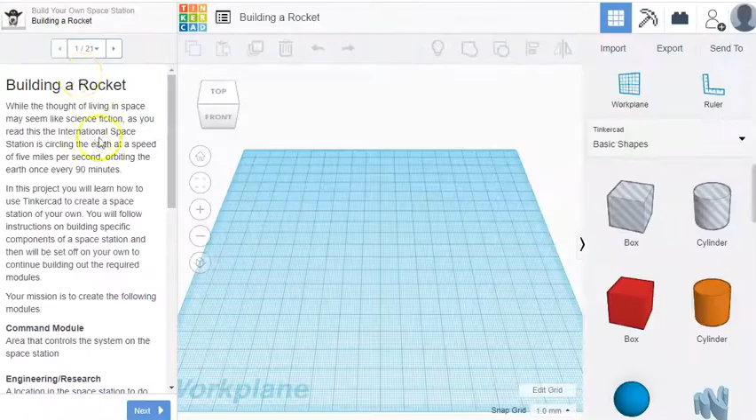Okay, in case anyone needs help, I'm going to work my way through this project. Build your own space station. So you just need to scroll down, go to lesson 1, building a rocket, and we have instructions here that we can progress through. So not every step requires you to do something, but it's a good idea to just read through this information to get an idea of what you're going to do.

So you're going to create the following modules: command, engineering or research, living quarters, storage module, and propulsion. Okay, so scroll all the way down and just keep clicking next. So introduction, first thing we'll do is the propulsion system. All right, so again, just click through to the next one.

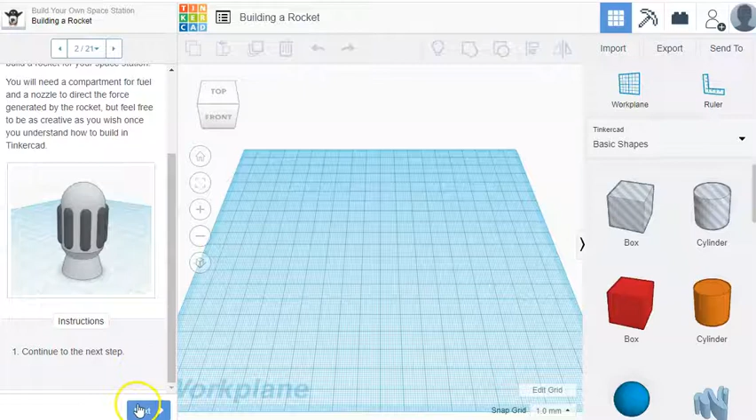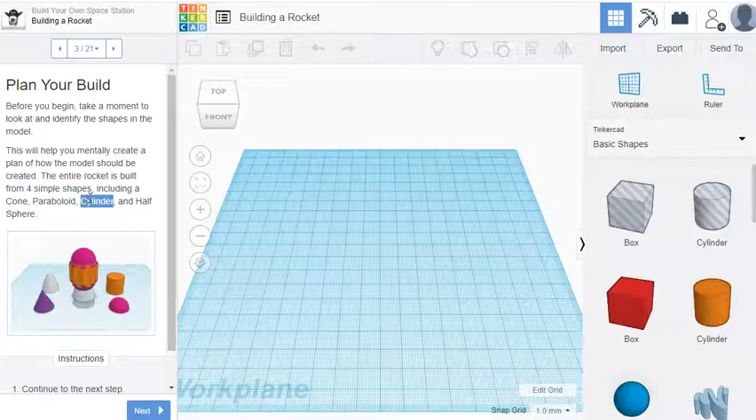Plan your build. So it's just good to familiarize yourself, especially if you haven't used Tinkercad before. So we've got different three-dimensional shapes, including cone, wow, a paraboloid, cylinder, and a half sphere. So you find all these things over here. So here's a paraboloid, here's a cone, cylinder, and a half sphere. Too easy. Go to next.

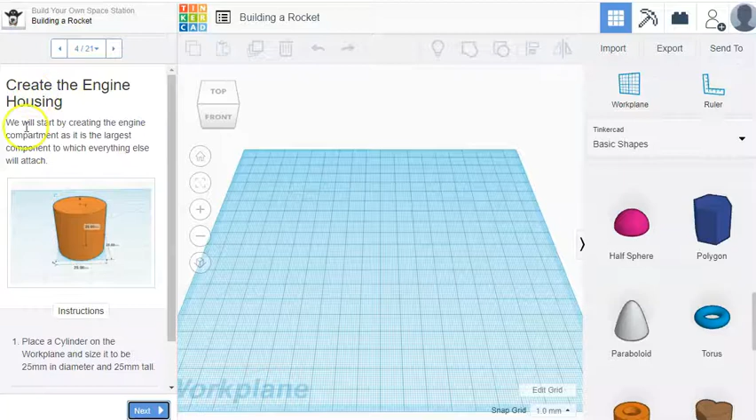Okay, create the engine housing. So here's some instructions. Place the cylinder on the work plane. It's easy. Let's find a cylinder. So you just click on it and somewhere press click again and it will place it. Now we need to resize it. We want 25 millimeters in diameter and 25 tall.

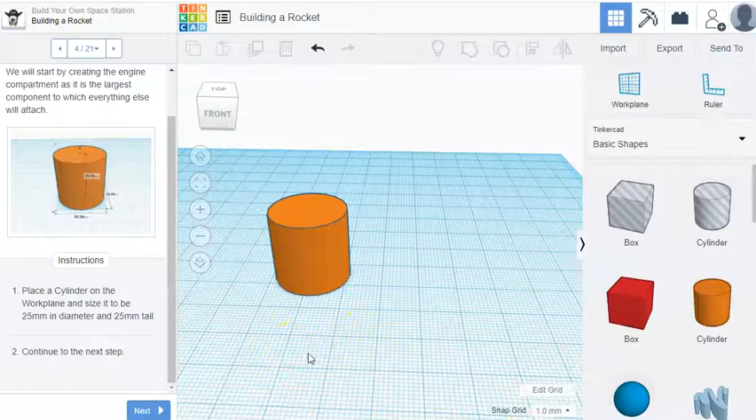Just a few tips on moving around. If I want to zoom in, if you've got a mouse, it's so much easier. So I thoroughly recommend getting a mouse. So to scroll in, I just use the mouse scroll button. All right, if I want to move around, if I click the scroll button, I can drag the work plane around. Also, if I click the right mouse button, I can just hold and drag it around like so as well.

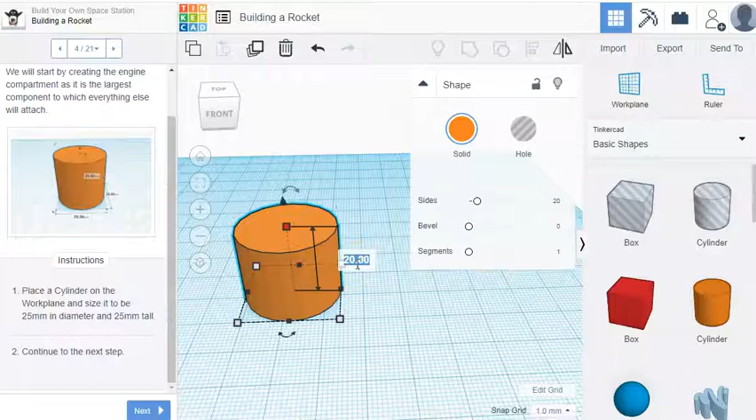I wanted to just reposition this here a little bit and click on it so I can get these dimensions. So here we want 25 mil diameter. So to resize it, I think you can actually type over there to make your life easier. So that's 25 mil diameter, and we want to check the height. So if we click on this bit here, we can see the height is 20, so I can click on that and say 25 and change it that way. So it's that much easier to do it that way. Once I've done that, I'm going to the next step.

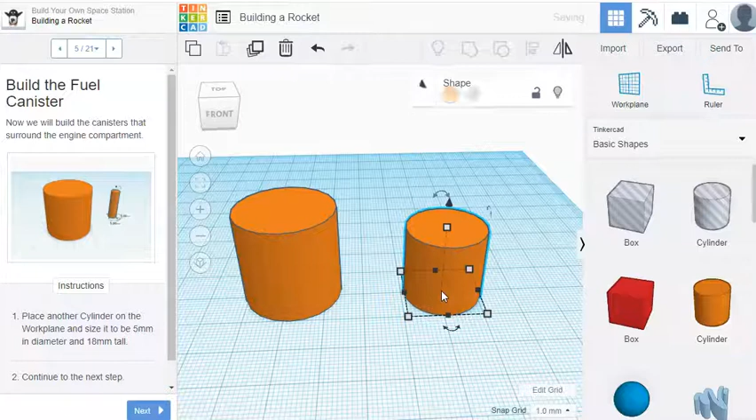Build the fuel canister. So it says place another cylinder and size it 5 millimeters diameter and 18 tall. Okay, so I'm going to get rid of that. Click that and place it. So that means I want to change this to 5 millimeters. 5 millimeters on that way, and then I need the top one, click on that, and 18 tall, so I click here and I change it to 18. That's easy. Let's go to the next one.

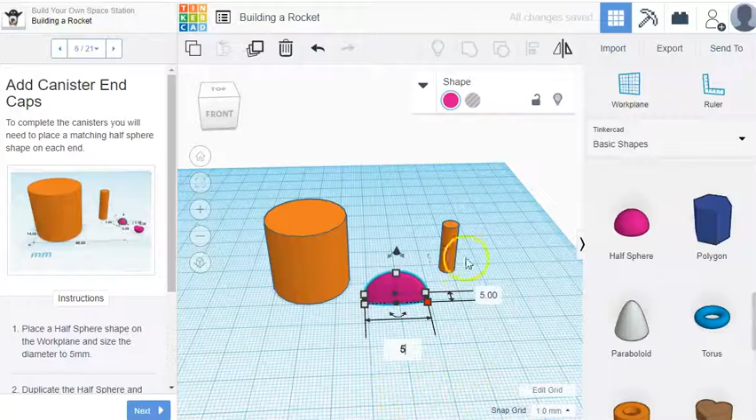Place a half sphere shape on the work plane and size the diameter 5 millimeters. So half sphere, click, place. Let me zoom in a bit. Okay, so 5 by 5. Yep. Okay, how do I get out of that now? I press escape. Okay, so I'm going to scroll out a bit, resize, so 5 and 5. I'm sure there's probably an easy way to do it 2 at once, so someone else might want to work that one out.

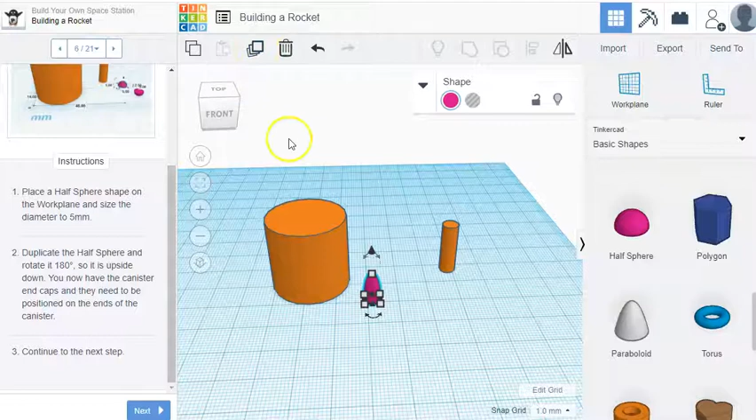Duplicate the half sphere and rotate it 180 degrees so it's upside down. Okay, so I've got to duplicate. Duplicate is this button. So I press this button while this is selected. Duplicate, and then if I move it, I can see I've got a second one. Now rotate. Okay, if these things would all get out of my way so I can actually see what I'm doing. I'm going to just get my right mouse. Okay, so here's my angle. If I click that and say 180, it's upside down.

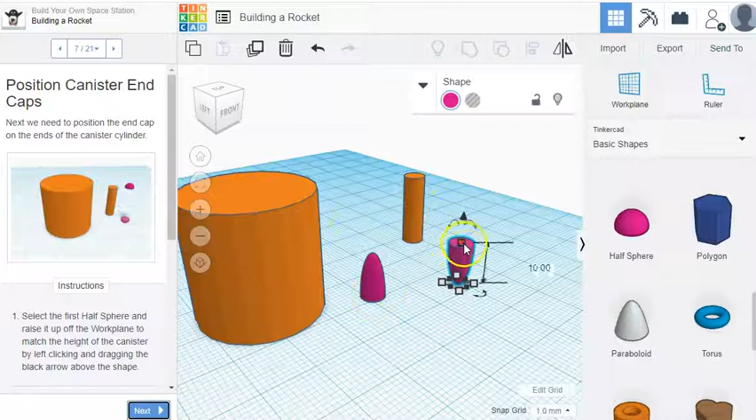All right, but it still doesn't look like that. So I've got to work out, is this correct? All right, obviously not. So they've missed something. So I'm going to resize the height to 2.5, which looks like what they've got in the diagram. So if I change that to 2.5 as well. Okay, and that looks better, doesn't it?

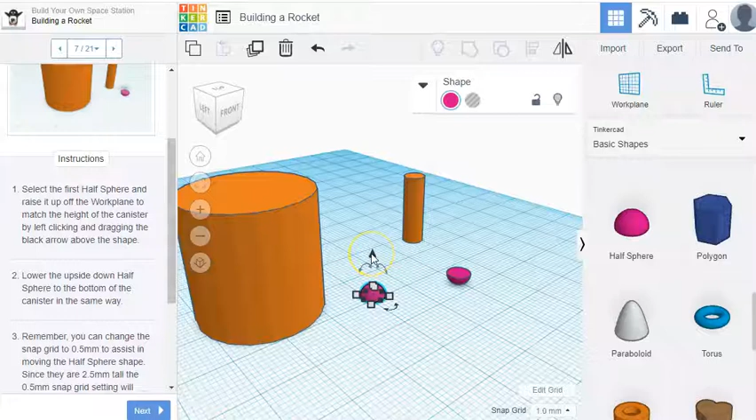So we select the first half sphere and raise it up off the work plane to match the height of the canister. Now the height of the canister is 18. So we want to raise this. So we grab this little thing and raise it. And so we're looking for when it says 18. Voila, too easy.

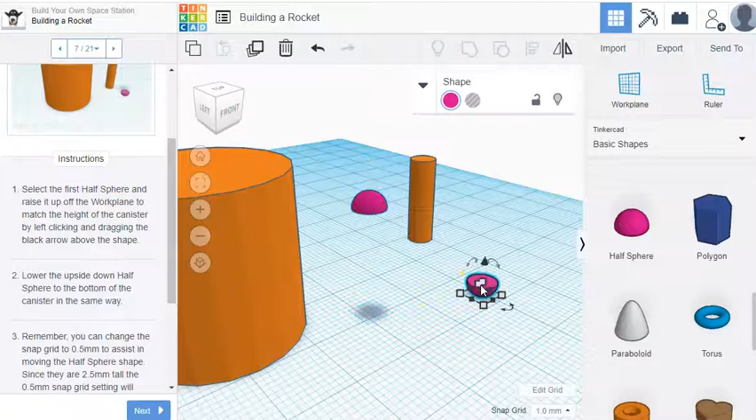Lower this upside down half sphere to the bottom canister in the same way. Okay, so I need to click on this one. So it's currently at 2.5 here. If I click this, I'm assuming I need to make it go there, possibly. Let me just see if I do that. Yeah, that looks like it's the same now, doesn't it?

Okay, so I think there's some assumed knowledge here. Remember, you can change the snap grid to 0.5 to assist in moving the half sphere shape. Snap grid, I found it, it's down in this corner here. So change it to 0.5. Easy, so I've changed it to 0.5.

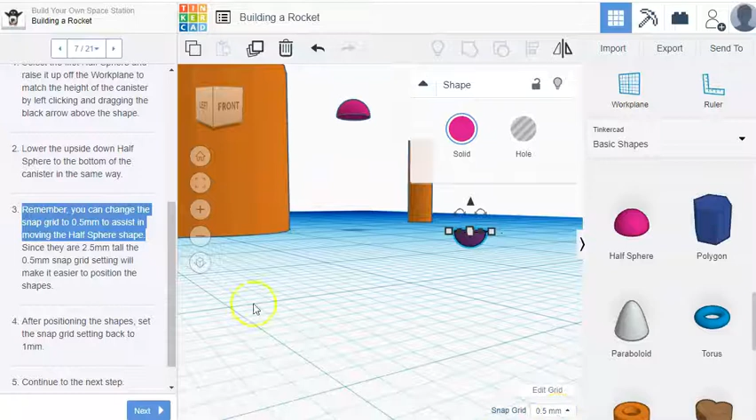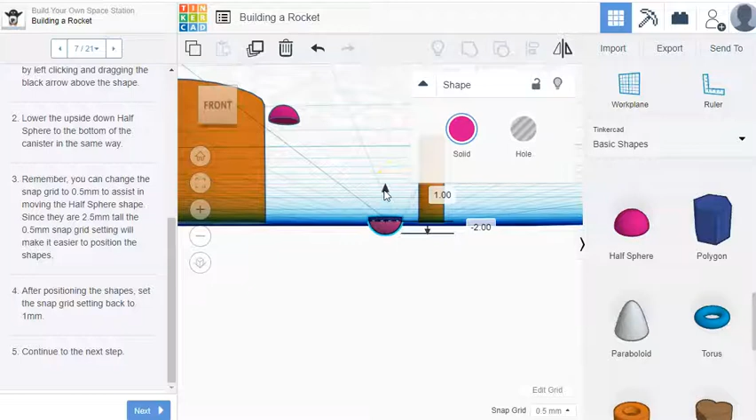Excellent. After repositioning the shapes, set the snap grid back to 1 mil. Okay, well, I think I did that in a roundabout sort of way, but I think I'm right. Let me see. Wait, maybe that, was that better? Oh, okay, that's better. All right, that's done, and put it back to 1. Continue.

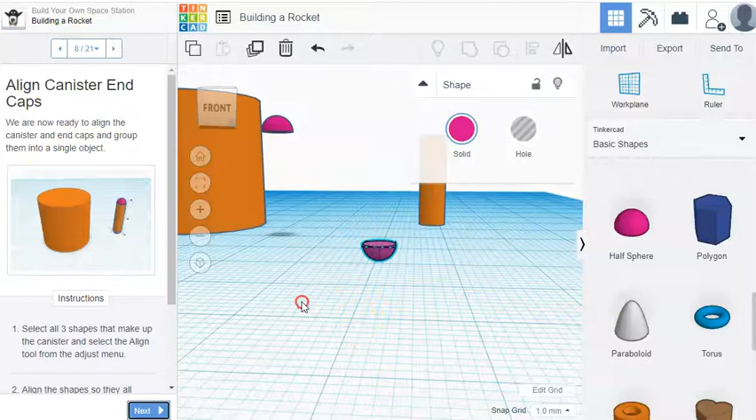Okay, now we're ready to align. So we want to put all of those pieces together like so. So, okay, what I believe you do is click to select the first one, shift click, and you'll see there's little blue shading around both of these now, so they're both selected, and then shift select. So they're all got blue shading, so I'm assuming yes, and it says shapes 3. They've all been selected. Okay, so now align the shapes so they all share the same axis vertically and group them into a single shape.

So again, assume knowledge. Align. Let's give it a go. Okay, and then, okay, align them all here and click on here. Did you see what I did? I'll go Control Z, Control Z.

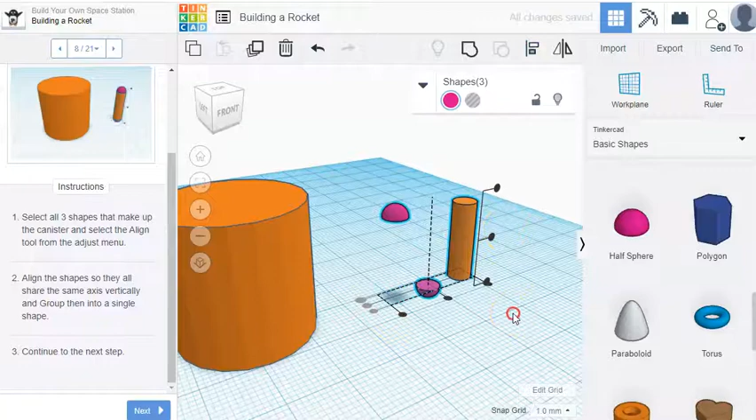So to align them, I press align. Okay, I want to align them all on this in the middle here. So if I click here, they all align up along there, and then I want them now to align in this middle. So see how if I click that, they all come together. Then the last thing I do is group them. So group, press that, and they are now grouped.

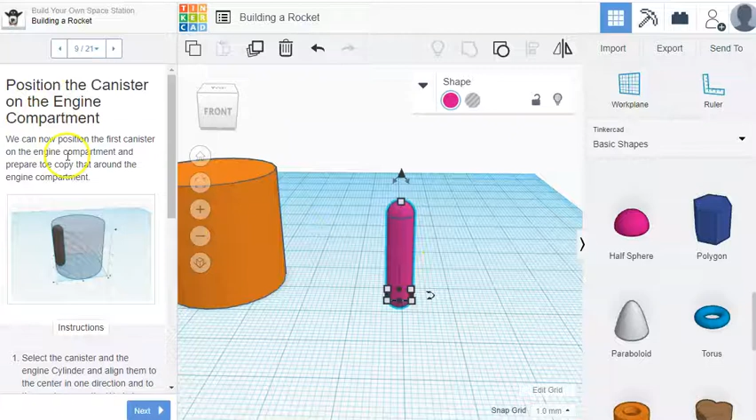Click next. So now we're going to position this canister on the engine compartment. So this is the canister, this is the engine compartment, and we want it to look something like this. All right, so we need to work out how to do that. So get the whole lot.

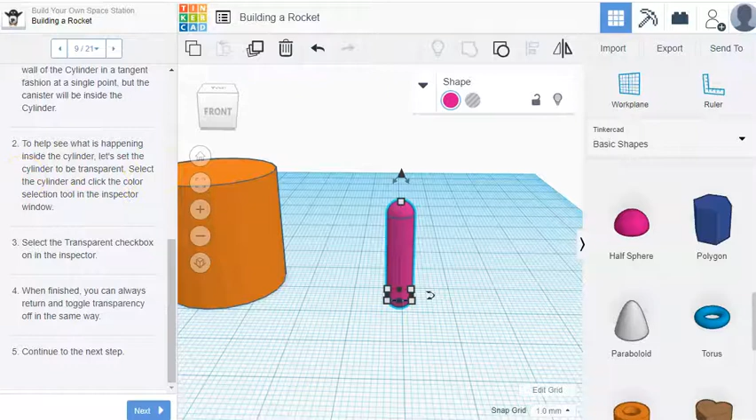To help see what is happening inside the cylinder, let's set the cylinder to be transparent. Okay, that's a good idea. Select the cylinder and click the color selection tool in the inspector window. Okay, so if we click this, it's now transparent. Okay, select the transparent checkbox. When finished, you can always return.

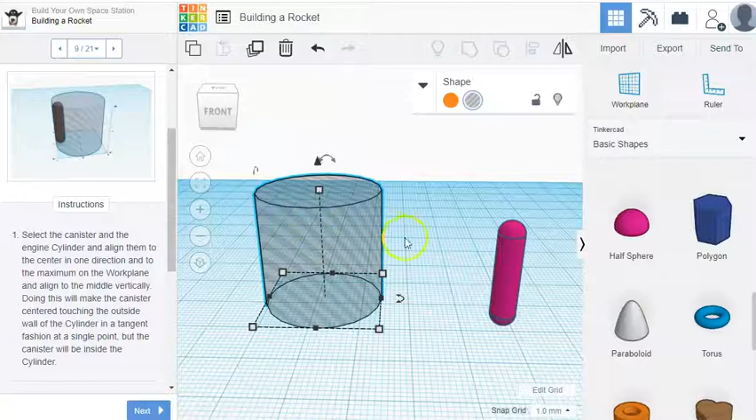Okay, all right, so let's go back to here. Did they make... okay, so we select this. I'm going to drag this way so I can see what's happening. And I want it to be like so. All right, so I want this aligned over here. So it's aligned here and here. Okay, so select this one, then shift select this, then press align, then press this, then press this, then press this. Okay, and that looks exactly as required.

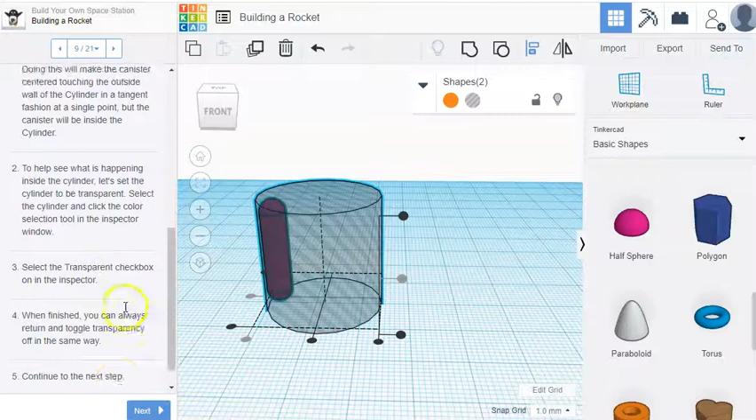So go to the next one. Now we have to move it slightly. So let's have a look. All right, we now have to move it slightly. So how do we do that?

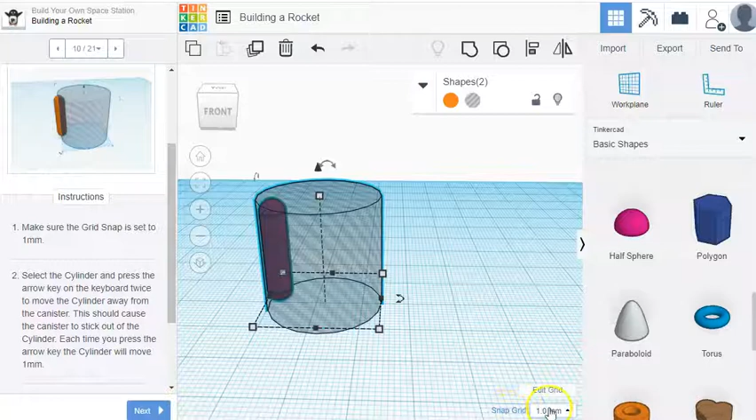Make sure the grid snap is set to 1 mil. Correct, snap grid is 1 mil. Select the cylinder, so I'm going to click off here. Select the cylinder, which is this, and press the arrow key on the keyboard twice to move the cylinder away from the canister. So press the arrow key twice. So I'm assuming I'm going to press the right arrow key. Let me try it. So once, twice. Beautiful, all right, that seems to be fine.

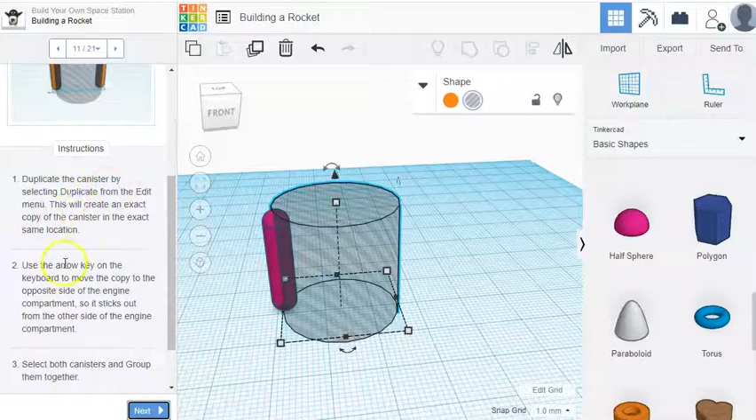Okay, go next. Ooh, looks like we have to copy the canister and move it. So duplicate the canister by selecting duplicate. So click off, click the canister, click duplicate. Use the arrow key on the keyboard to move the copy to the other side. Okay, so it's now selected. I'm going to move it with the arrow. Okay, here it's at the edge. 1, 2. Okay, easy peasy.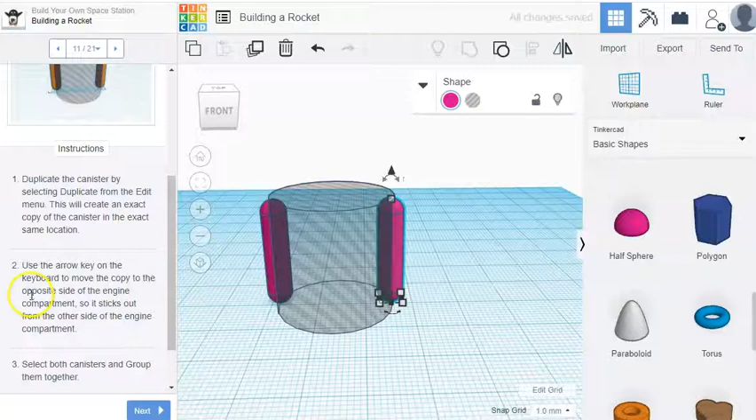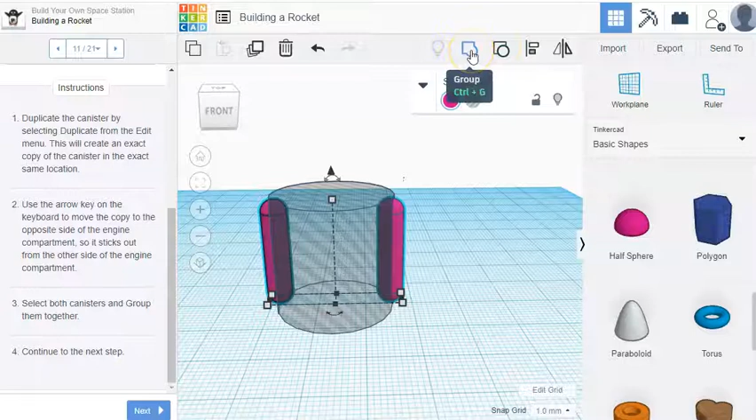Blah blah blah, so it sticks out. Yep, select both canisters and group them. Okay, so I've got this one selected. If I go shift and select the other one, done. Group them. Group, what's that? Ungroup. So I want to group just those 2 canisters. They're grouped, okay, done. Go to next.

All right. Oh, look at what we do now. So we're going to obviously copy them and reposition them. So select the group canisters. They're selected. Duplicate them by selecting the duplicate button. Okay, which is here. Duplicate and duplicate. Okay, so I've duplicated. Now use rotation arrows to rotate 45 degrees.

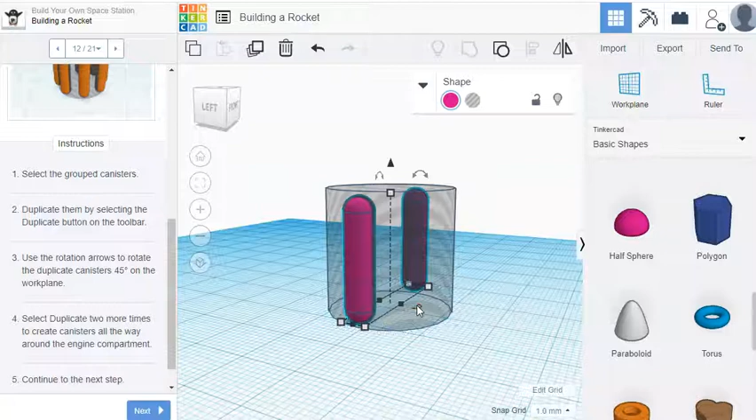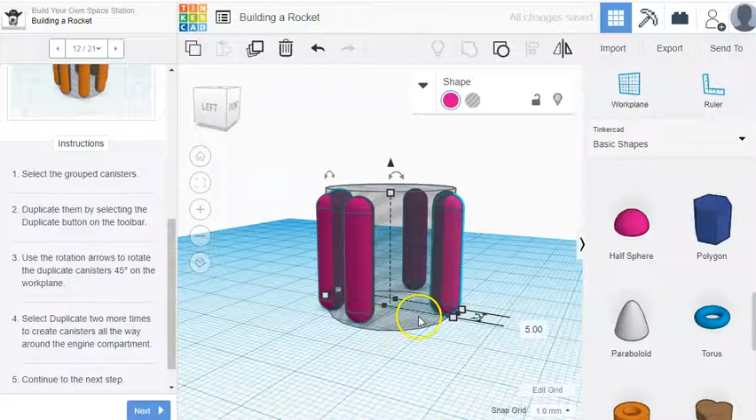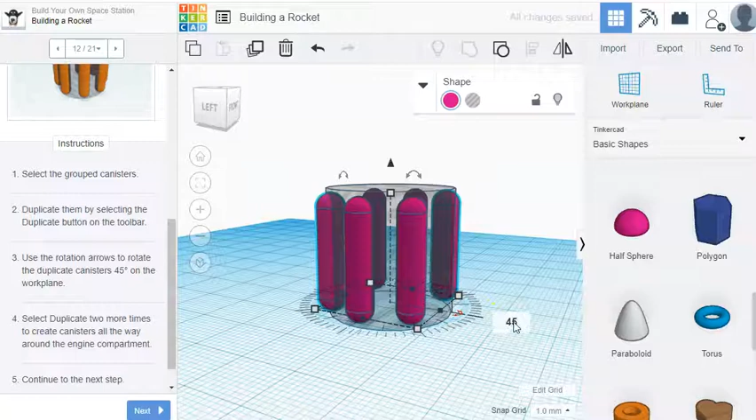Okay, here we go. So down here, we want this rotation. Click on there and type in 45, enter. Duplicate 2 more times. So duplicate, go down here, find the rotate. If I don't do it right, I can just undo. 45. Okay, and I have to do it once more. So duplicate, find that 45, and done. I'm going to right mouse click and have a look, and that looks awesome. Does it look like that? Yes, it does.

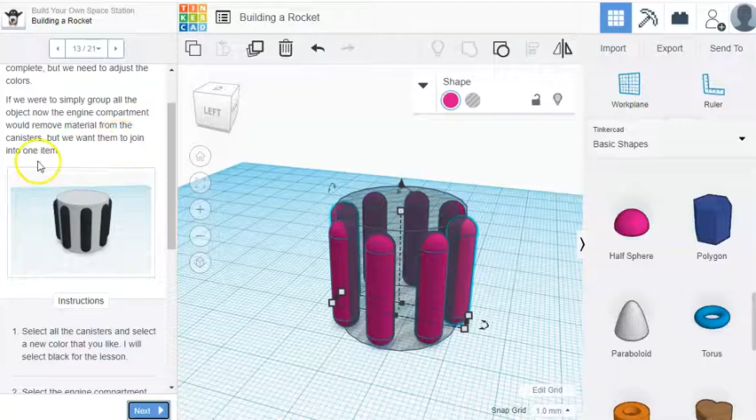Okay, go to next. We now have an engine compartment and fuel canisters complete, but we need to adjust the colors. If we were to simply group all the objects, the engine compartment would remove material from the canisters, but we want them to join into one item. So select all the canisters and select a new color.

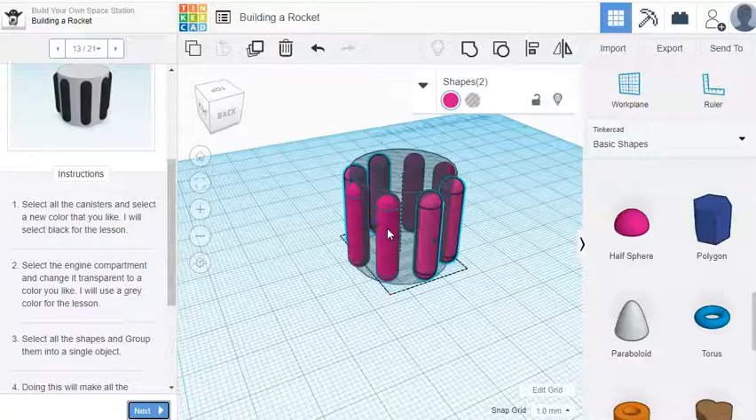I'm just gonna scroll around. I want that one, scroll, and then shift and select that one, and just keep going around. Shift, select, shift, select. Okay, are they all selected? They all seem to be selected. Okay, very good, so they're all selected.

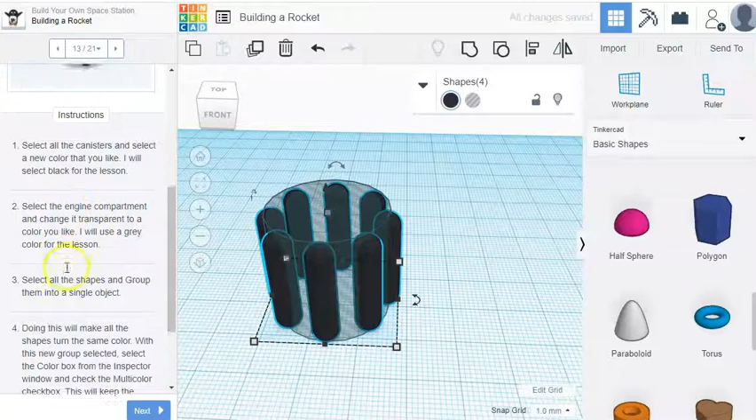So I'm going to choose black, I guess. Okay, that worked. Select the engine compartment and change it, change transparent to whatever color. So unclick, click on the engine compartment, and it's going to be pretty boring, give it a grey sort of color. Click off it. Okay, there we go, it's looking good, looking good.

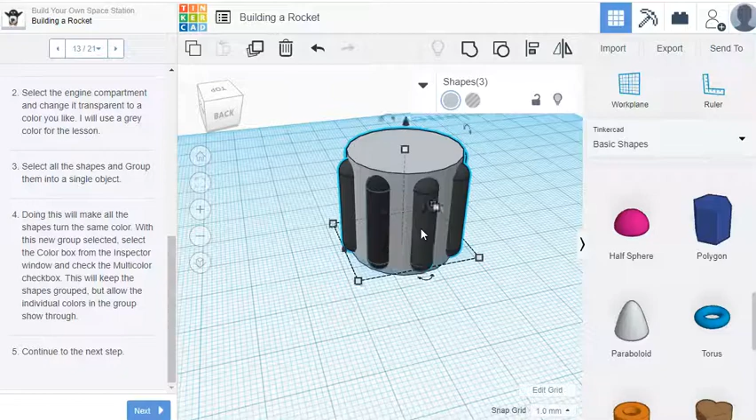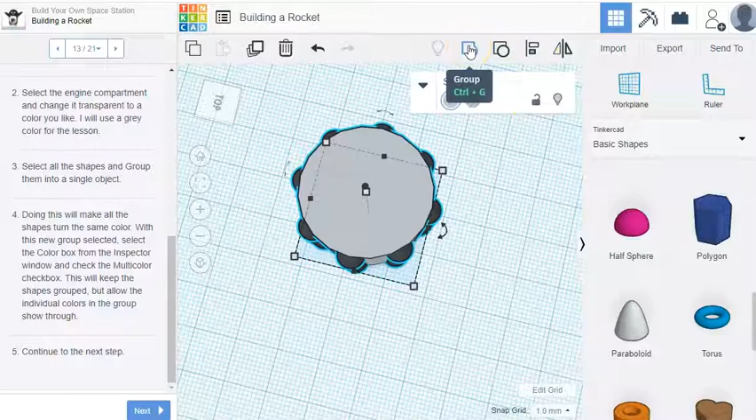Select all the shapes and group them into a single object. So I need to select the cylinder and then shift and select all of these. I have one more to select, that one. Okay, I can see the blue around all of my shapes, so I've done that correct. And then I'm going to group them. So group. Okay, so they are now all grouped. Go to the next one.

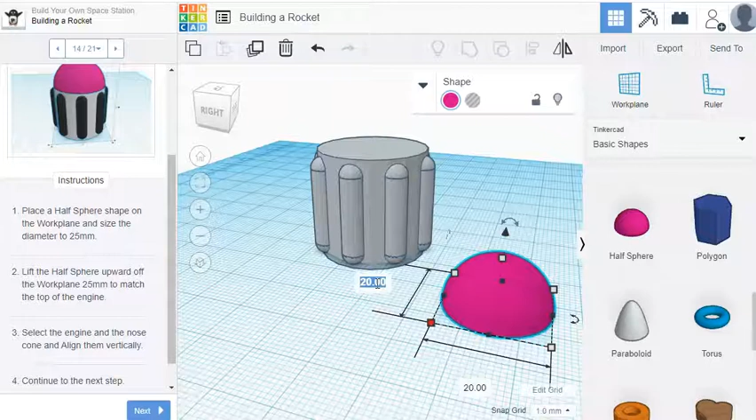Add a nose cone. Okay, so we want a half sphere. Place a half sphere shape on the work plane and size to 25. I'm getting the hang of this. So let's click here and here, change this to 25, change this to 25. Okay, it's 25 by 25.

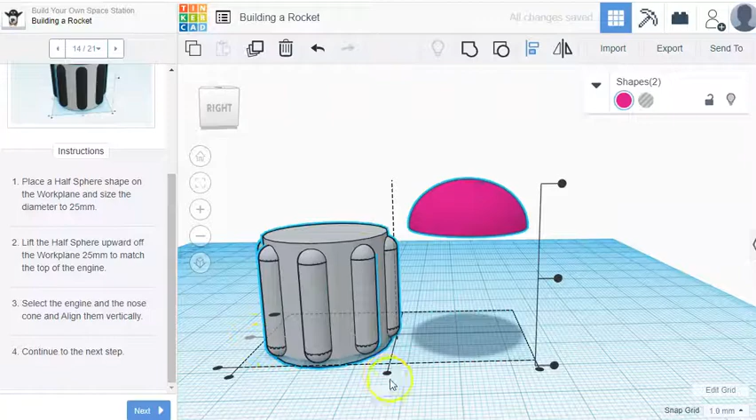Lift the sphere up. Okay, it's got to go up 25. Well, let me just get that out of the way and move that across, make it easier to see. So I'm going to lift that up till it says 25, and that's the same height as that. Select the engine, and we're aligning them. So that's selected, I'm going to select this. I'm going to press align. I'm going to align them in the middle and in the middle like so.

Okay, I seem to have a gap there for some reason. I'm not going to press that because that'll do that. So I'll undo that. But for some reason, okay, my cylinder is slightly under. So I'm just going to lift it up to there. Is that right? And that should close that gap. And that should get it flat on the work plane. Okay.

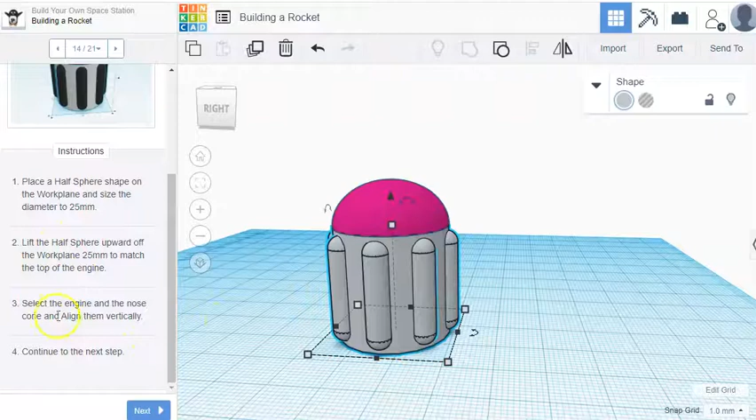Go to the next step. Okay, add the thrust cone. So place a cone on the work plane and size it to 25 mil. So I need to get my shapes back, which are over here, and I want a cone. Place that. I want it to be 25 mil and 25 mil.

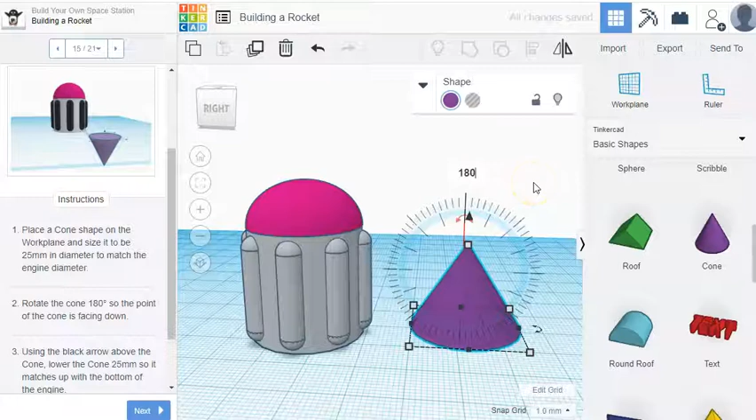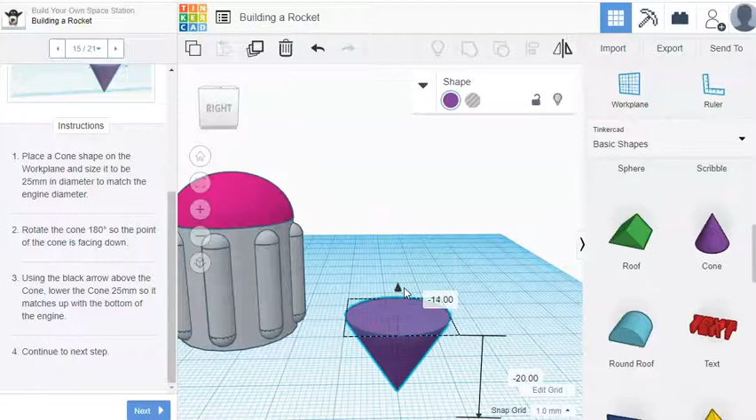And I want to rotate it. So if I click the rotation, and then I can click here and go 180, and it flips it upside down. Now I want to have that lowered by 25, so I need to click this bit, and I'll just get this here so we can see. We want that to be so I've got that selected.

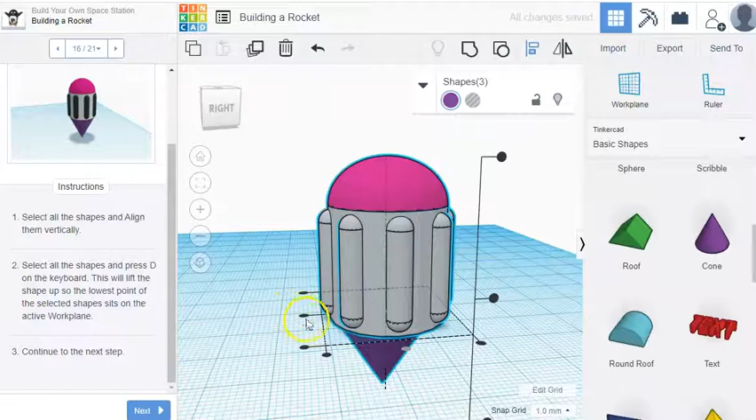Next, okay, we've got to align them, so select all shapes and align them vertically. So I select this one as well. I press align. I want them all aligned in the middle, and I just want to make sure they're all aligned in the middle here as well. Okay, I think that's right. Let's check. That looks good.

Okay, I've just noticed here, I'm going to bring this up. They've got this raised up here. So while I've got everything selected, I need to raise that up. So let's see how much. Up. So it looks like that.

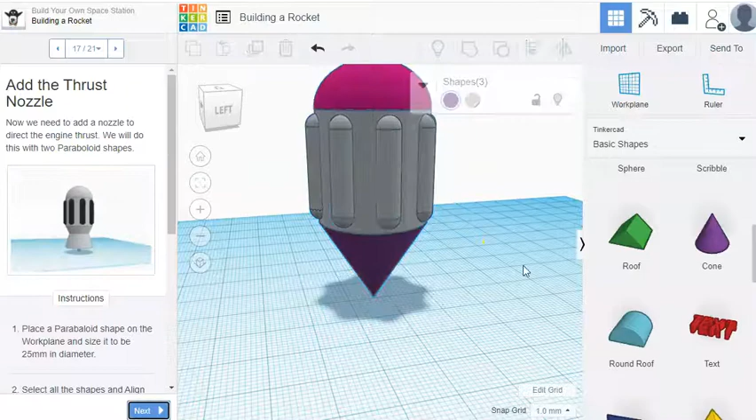Okay, so as I said, we're on to this bit here. So I'm going to unclick this. I might scroll out a bit. I might just move this around, just check how it's looking. I think it looks pretty good.

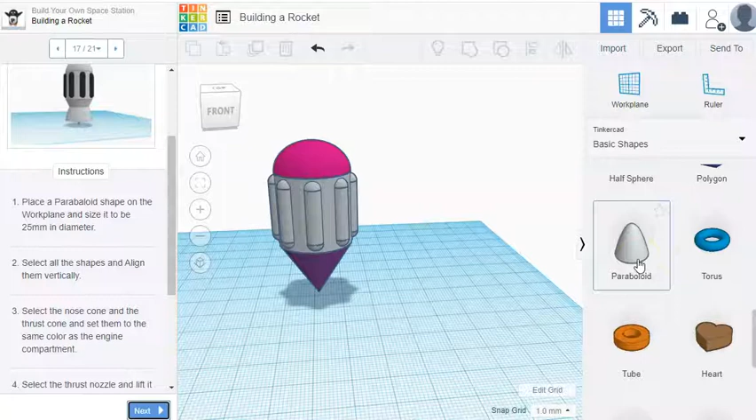We want a paraboloid. You know what, I've never heard of a paraboloid, but well, probably have, but I forgot. So here's a paraboloid, I'm going to place it. And 25 mil diameter again, so 25 at the base, 25.

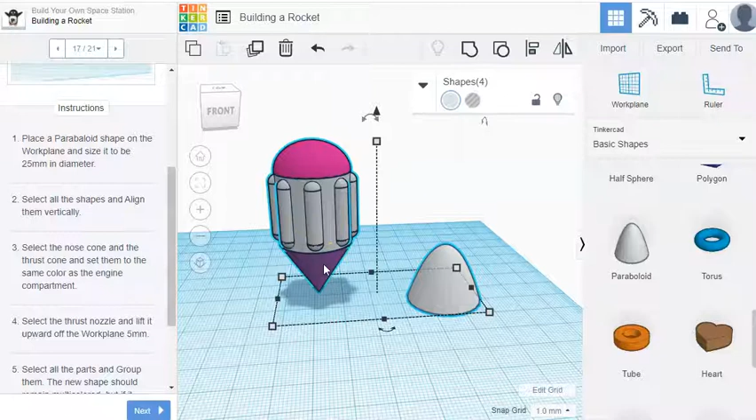Select all the shapes and align them vertically. Oh, okay, so this is easy. So shift, select, shift, select, shift, select, and then align. We want them aligned in the middle this way, and then come around this way and align here in the middle. Okay, that looks good.

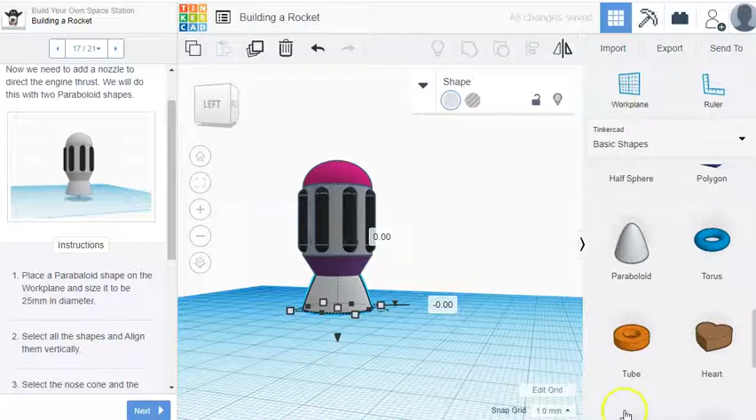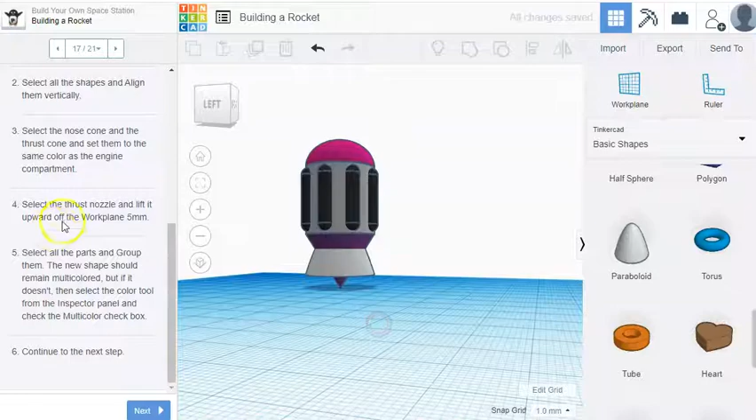Okay, I've got to move. Select the nozzle and lift it up off the workplane. I get it, I need to select this and raise it up. I'm just going to click this one here, wait, let me get back down. I need to raise it by 5 mil. So I'm going to raise 1, 2, 3, 4, 5. Okay, that's what they were saying. All right, that's better, so that should look like that.

Next, hollow out the thrust nozzle. Place a paraboloid shape on the work plane and size it to 25 mil diameter. So 25 and 25. Okay.

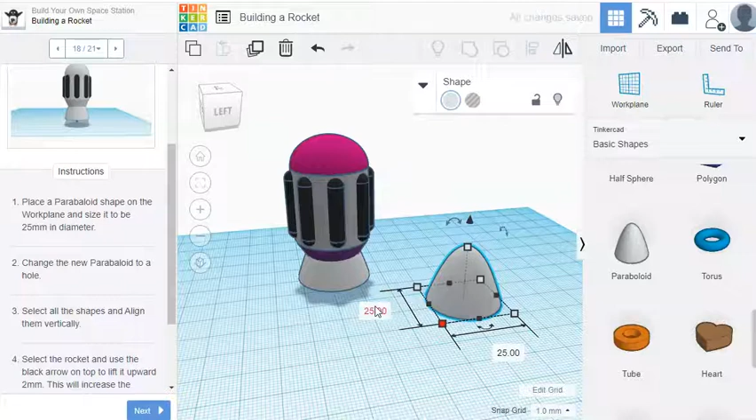Change the new Paraboloid to a hole. Okay, hole, is that a hole? Change to hole, okay, change to a hole.

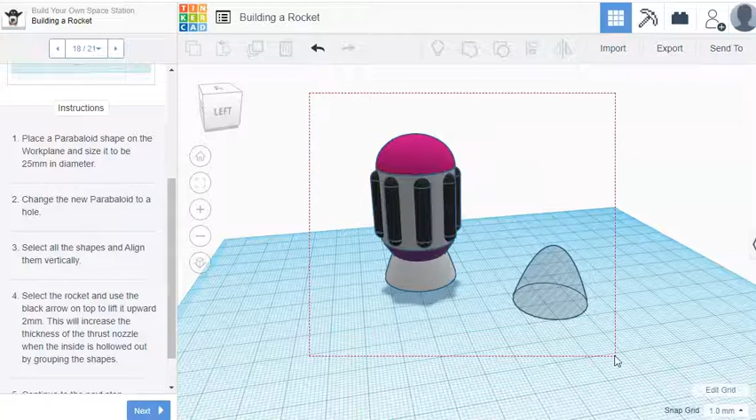Select all the shapes and align them vertically. Okay, so I learned that if I click here, now it's not cooperating with me. Okay, click and drag, and that selects everything. Did you see what I just did? I just went click and drag around, and I've selected everything. Select all shapes and align vertically, click that. Oh, I'm so tired. Align this way, align this way.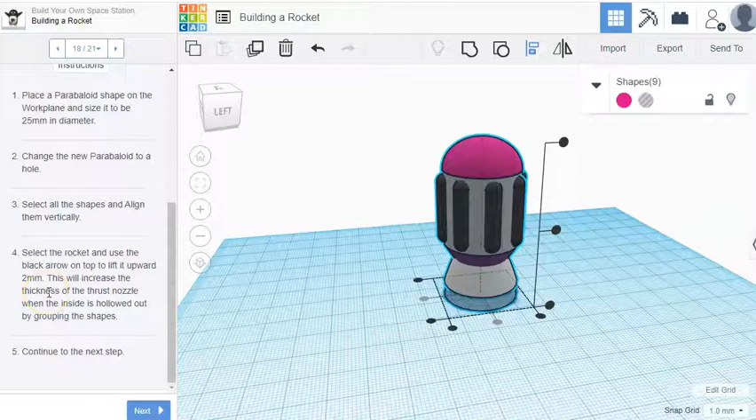Select the rocket and use the black arrow on top to lift it upward 2 millimeters. This will increase the thickness of the thrust nozzle when the inside is hollowed out by grouping shapes. I don't know if I understood that at all.

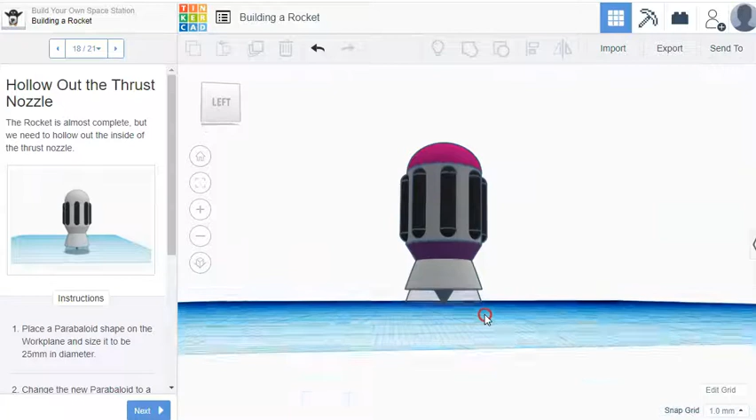Select all shapes and align. Select the rocket, okay, so I'm assuming I can unclick that. Let's try selecting everything and then unselecting by shift-clicking that bottom shape. And then I'm going to lift this 2 millimeters, and see what happens. 1, 2. Do you think that's what they meant? Okay, I don't care, it's good enough.

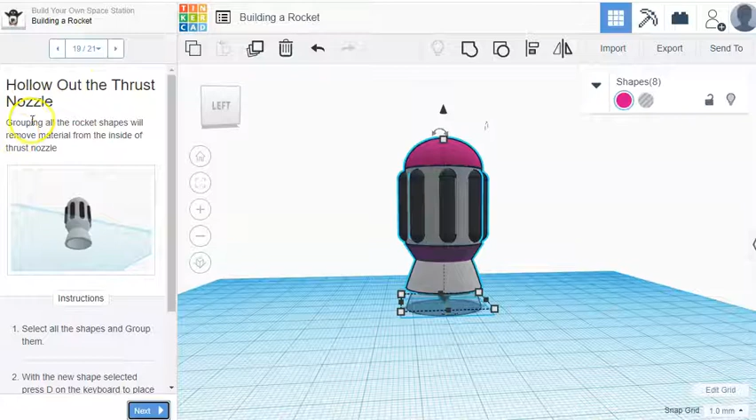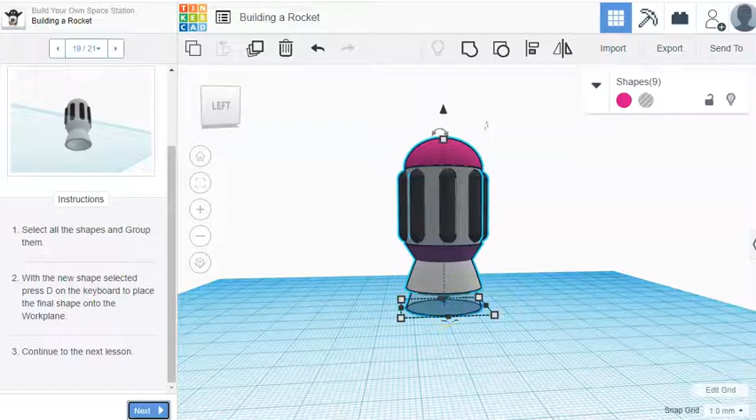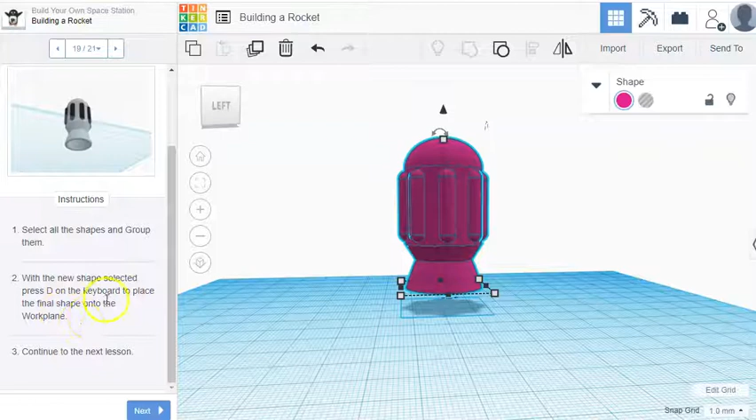Hollow out the thrust nozzle. Grouping all rocket shapes will remove material from the inside thrust nozzle. Okay, select all shapes and group them. I'm assuming they want me to select all shapes, including the hole. Oh wait a minute, select all shapes and group them. Okay, I've got to group them. Group. Okay, I don't know, did it work? Oh it did. Why did it make them all one color? Okay, press D, press D. And that worked, continue. Oh my goodness, I can't believe it. Except it's just messed up all my colors.

Place the cylinder on the work plane and size it to 15 mil in diameter and 15 tall. Okay, so place the cylinder on the work plane and size it 15 by 15 diameter by 15 tall.

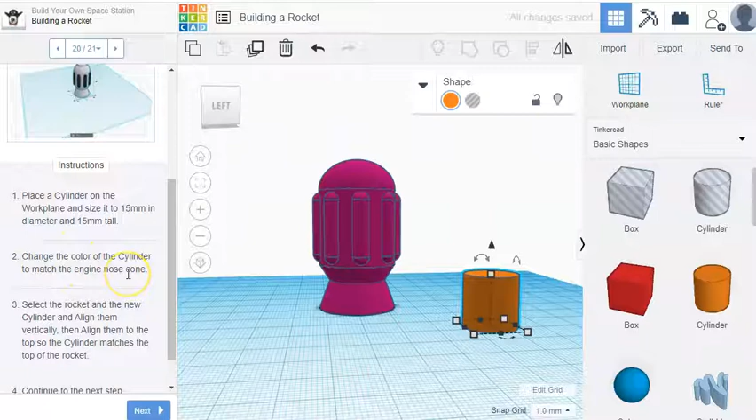Change the color of the cylinder to match the engine nose cone. I'm just going to make it blue.

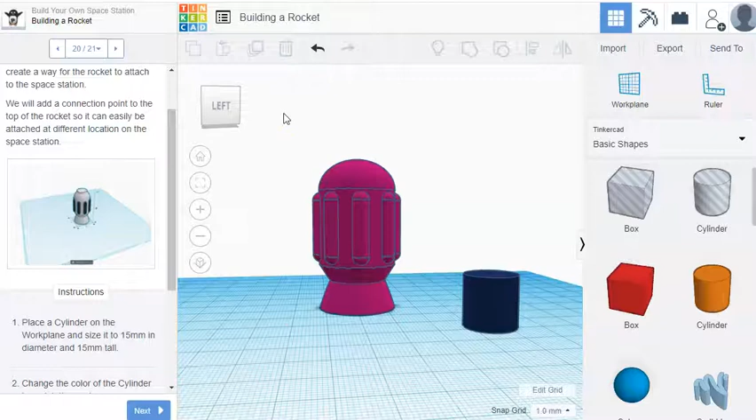Select the rocket and the new cylinder and align them vertically, then align them to the top so the cylinder matches the top of the rocket. Okay, let me see, so it's got to look like that, so this at the top. Okay, so I'm going to align them all this way. No, okay, try again. I'm going to align them this way, this way, this way. Oh, too easy, it's not as hard as I thought it was going to be.

Okay, go to the next step. Oh no, create a hole. Final step in creation is to create the hole that will allow the rocket to connect to the space station. The tube the rocket will connect with has a diameter of 10 mil, blah blah blah. Anyway, place the cylinder size 10.5 mil in diameter and 10 tall.

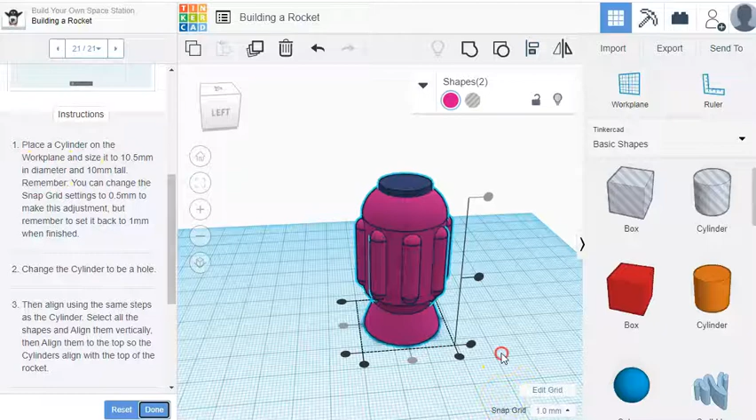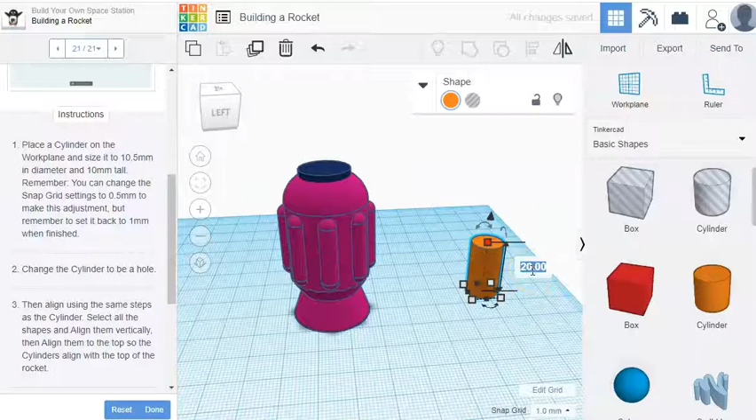Okay, so cylinder, so we want 10.5 diameter, 10.5, and then 10 tall. Okay.

Change the snap grid to 0.5, but remember to turn it back. Okay.

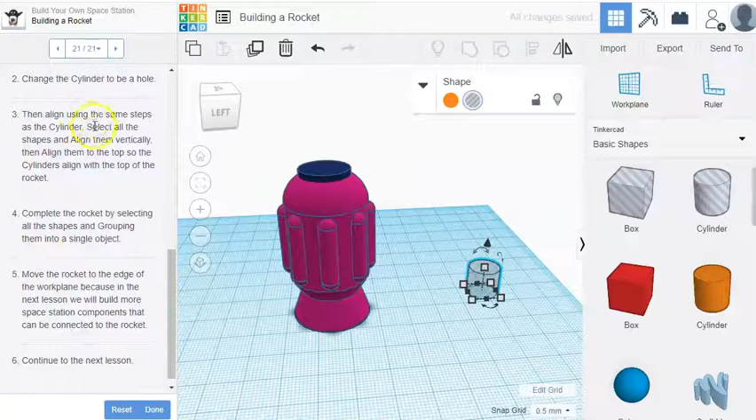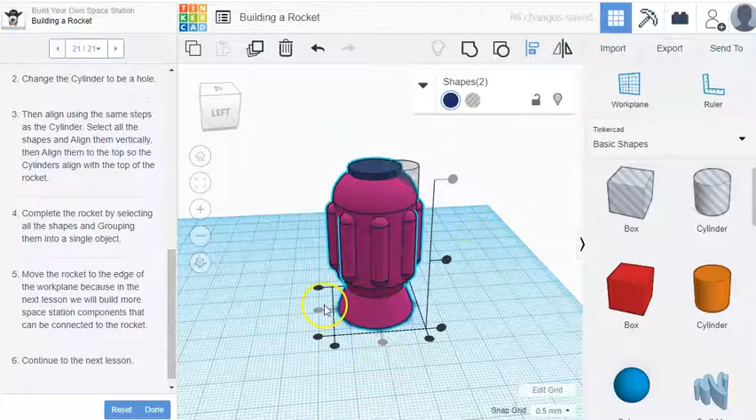Change the cylinder to a hole, then align using the same steps as the cylinder. Okay, so all right, so I want to go that way, that way. All right, this one's got to come. I messed this one up, didn't I? And I've messed this up too. We'll just try again. Okay.

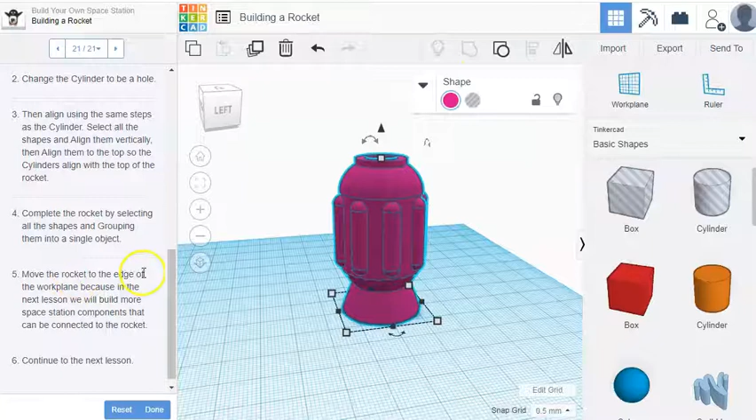Complete the rocket by selecting all the shapes and grouping them into a single one. And then they all become the same color anyway. Group. Okay, move the rocket to the edge of the workplane because in the next lesson we will build more of the space station. I can't believe I'm done. Anyway, so that's it for part 1, and look at that. Okay, look at that.